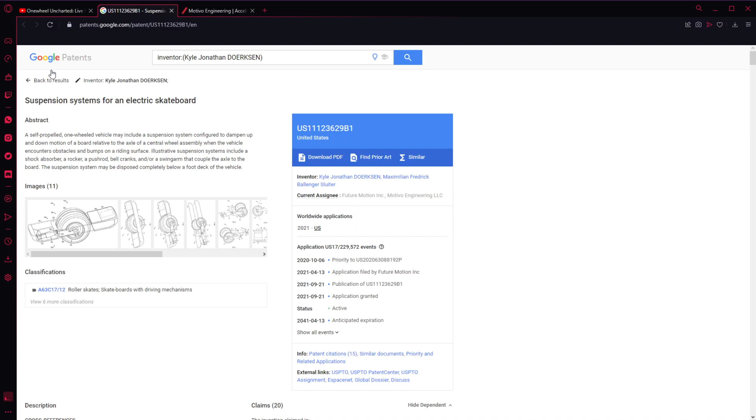On Instagram I put this on my story, and somebody responded to me with this link. It's a patent by Kyle Jonathan, and if you don't know, Kyle Jonathan is the CEO and founder of One Wheel. As you can see here, current assignee Future Motion Inc. This is very interesting because we're not sure if this is what's going to happen, but it seems like we're going to get a one wheel with a suspension system built in, as you can see from these pictures. I'll talk about that later.

With the abstract, I kind of grazed over all of this, but it's a lot of information—it's pretty much just repeating the abstract, and that's all you need to know for now. It's a one wheel that may—important word here, 'may'—include this. I don't know why they said 'may,' because that's an interesting word choice. What do you mean by may? Will you include it, or not? If you don't include it, why is there this whole patent about it? In my opinion, a patent should be about something you're sure about, not just 'may.' So I don't know what's going on here, whether this is still just a rough draft, or if there's something else to it.

It may include a suspension system configured to dampen up and down motion. Something interesting is that this suspension system is completely different from the Kiwi suspension system. If you don't know what I'm talking about, Kiwi suspension systems are these things right here—a very bulky thing, and they're very heavy as well. I wouldn't recommend them if you're looking for racing, and they're pretty expensive too. But it's pretty much like this, and if you compare this and this right here, it's not the same thing. This is insanely compact. Now I'm going to talk about these pictures a little bit later.

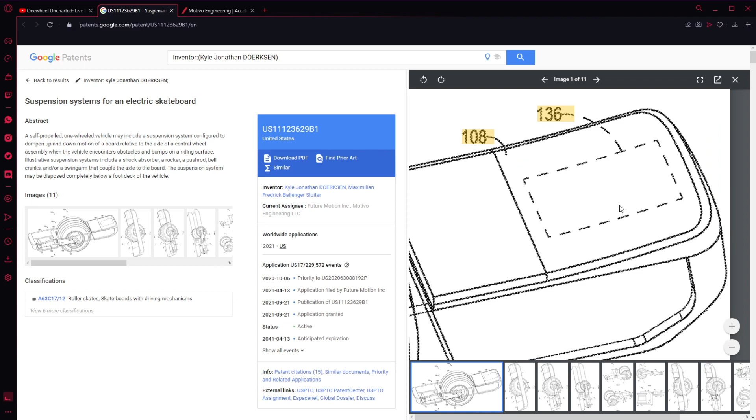I feel stupid now. Well, apparently this is for the electrical control system, which means this is also a very interesting shape for it. But it looks to be much smaller than our previous OneWheel controllers, which is interesting. And then there's all this empty space here.

If you notice, this place is sectioned off into two sections, as it literally says here. So would that mean... oh god, what have I done? Would that mean that the board is going to be longer? And another thing I see is it looks like the board is actually wider.

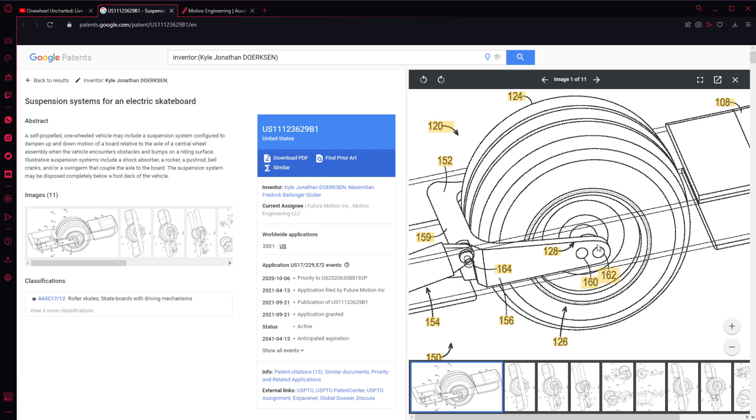This looks really wide for some reason, in my opinion. If you compare it to a normal one, I'm pretty sure there's not that much space between the rail and the screws in the middle. So I don't know what's going on with that, and I'm guessing it probably has something to do with this section right here.

But maybe the OneWheel is going to be thicker, wider, and maybe longer, or it's just giving the illusion that it's wider because maybe these foot pads are shorter, even though it looks kind of longer. And you'll see in another picture.

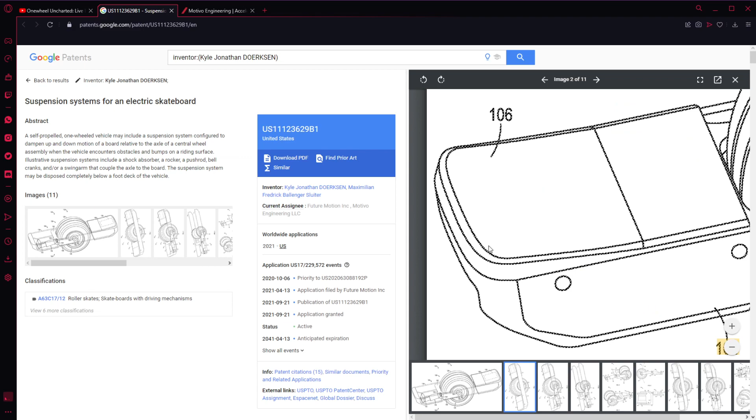So here we have it once again. I don't know if you can rotate it. Okay, here you can see it covered up. As you can see here again, there's two sections on the rear foot pad, and also it looks like maybe when you put in a different foot pad, you might only have to remove one section, because that's kind of how it looks.

And there's also these interesting holes here. I'm pretty sure it has something to do with these connecting points. That could be some pretty cool things, maybe having to do with mods.

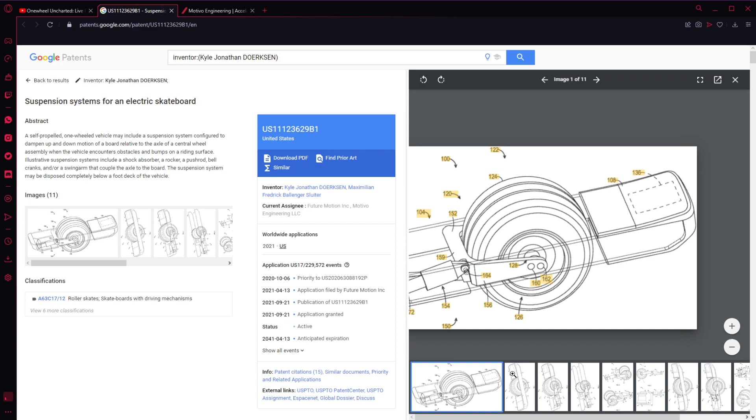Another thing I noticed is there's no screw holes here, even though here it shows there would maybe be some screw holes, or maybe that doesn't actually go through the rails, it just goes to the wheel, which I guess would make sense. But that would mean the actual wheel is connected through back here, which could do some interesting things if you want to put on modded rails.

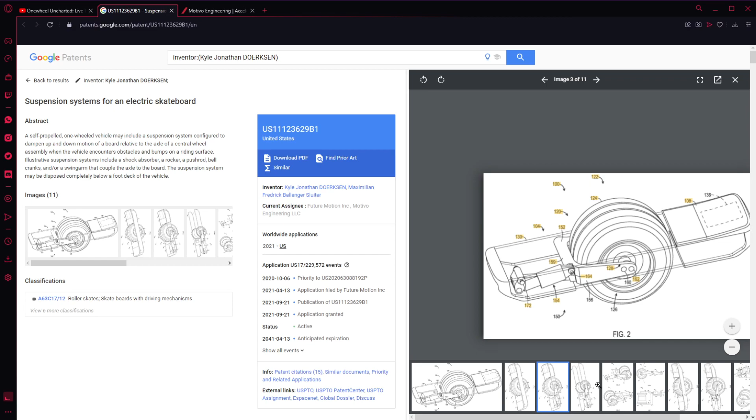And the thing is, I don't really know how it's connected to the front. I guess it would be vertically connected. And here, once again, we have it opened. I don't know why we have it opened again, because it looks pretty much the same as before, but once again you can pretty much see how it would be.

And then here we come to this part. This is where it kind of makes you think - these rails look... so first of all, the bumper will be a different shape pretty clearly. And it's interesting how much space there is here, which also makes me think they might be wider.

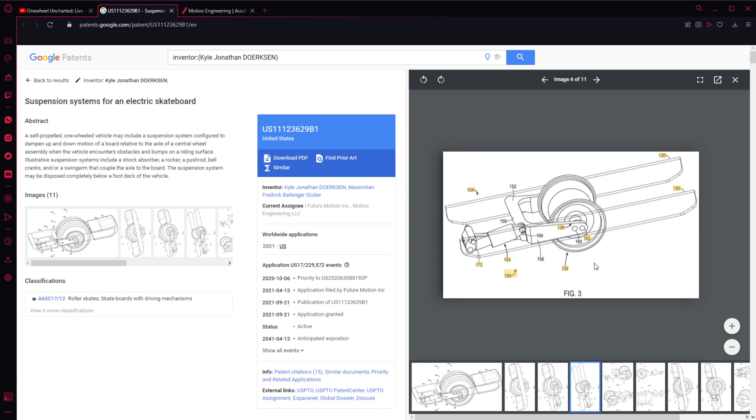And if you look at this, now I've never seen a board with just the rims, no tire, no foot pads, but this looks really long. So I don't know what's up with that. And here you have another nice view of it.

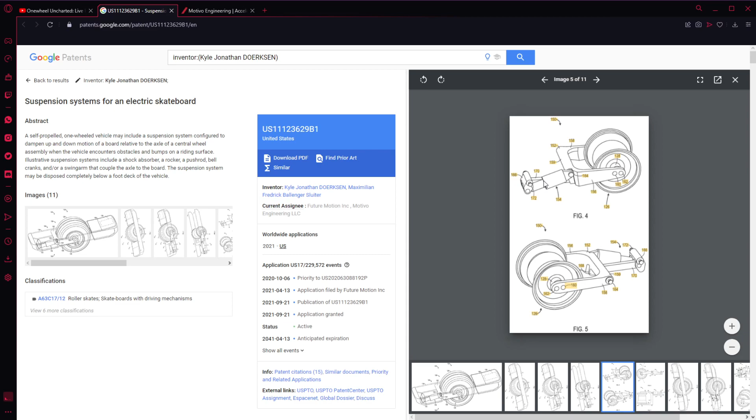So it's an insanely compact system. If this works, damn, good job OneWheel, because this is pretty compact for a full-on suspension system. Now it probably won't dampen things out as much as a Kill Guard suspension, but I'm guessing it'll still kind of dampen stuff out.

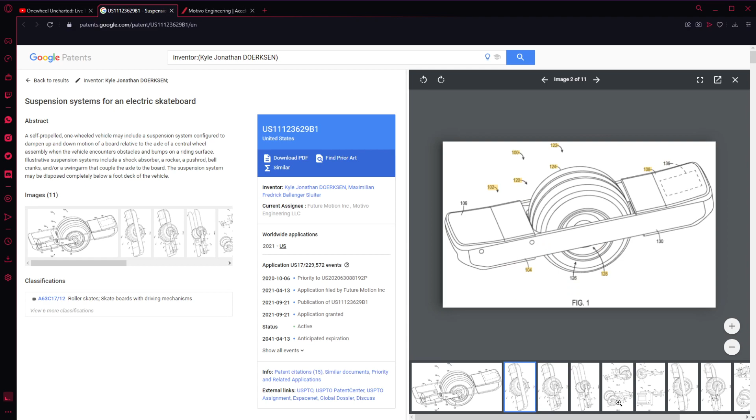Here you have another perspective of it. A thing that worries me a little bit is that it's only on one side, which would mean if the wheel is only connected through these two holes here - would that mean the wheel is only connected through here, like only these two points and not on the other side? Because that would be a very weak connection, it seems like.

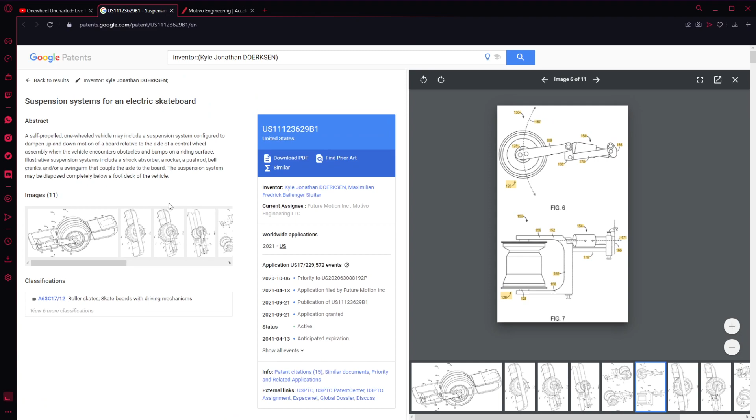Now, the next thing, which is very interesting, is there's actually two designs. They're very similar, but if I go to the next one, if you compare this one and this one, if I spin around and compare these two - see, it's different. There is this part right here. Now, I have no clue why there is this part.

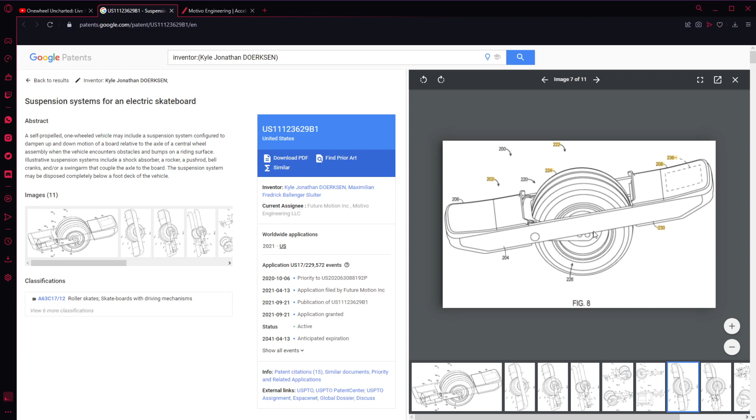I only noticed this now, but the board seems to be higher up somehow, which wouldn't be great, because we want a lower center of gravity, but maybe that's just how it's shown here. And there's going to be - the suspension system inside of here is also different.

But first I want to talk about these, because if we have these, it seems like it would be some type of sliding-in mechanism for the fender, instead of using screws. You would have to slide it in, which would considerably limit us in making more custom fenders.

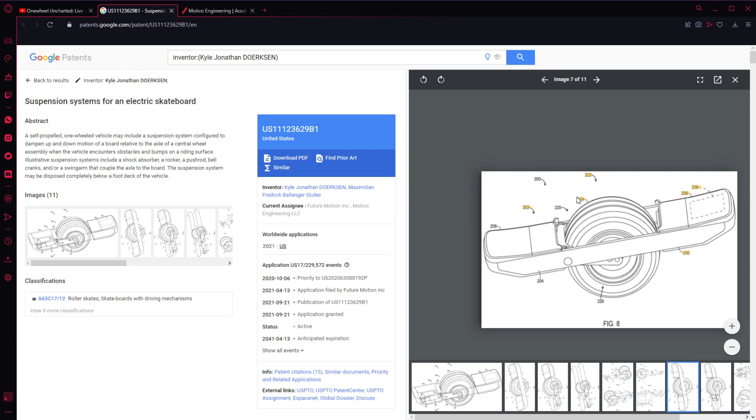That would also mean the fender would be easily removable, kind of like the Craft and Ride magnetic fender, maybe, depending on how secure it is. But that would also limit us a lot on how we can do it. Also, I've noticed there's a lot of space between the fender and the wheel, which I'm pretty sure a lot of people that ride with their feet close to the wheel would not enjoy.

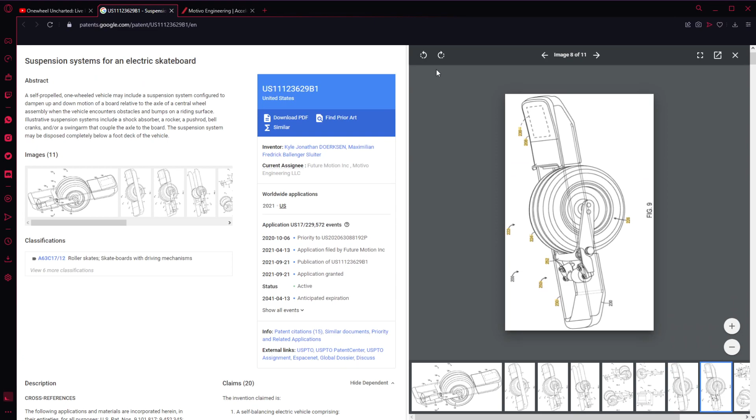Now here is where it gets very crazy, because here you can see the suspension. It's completely different than the other one. So these are two completely different designs. I don't know why they have this uplift thing because I don't even think you need it here. But this thing right here takes a lot less depth space than this one. As you can see, this one goes all the way in, but it only takes half of the width, whereas this one takes the whole width.

But then there's a lot of space back here, so maybe for this design, if they go with it, the battery might stay behind, and it might actually have a weird shape, seeing how they made this interesting form right here. There's a lot of up space somehow. So maybe the battery will stay behind, and here it does seem like it would be far more secure by connecting on both sides of the rail instead of just on one side.

Then again, it might connect - oh, it connects here as well, but this really doesn't seem as sturdy for the wheel holding in as other wheels.

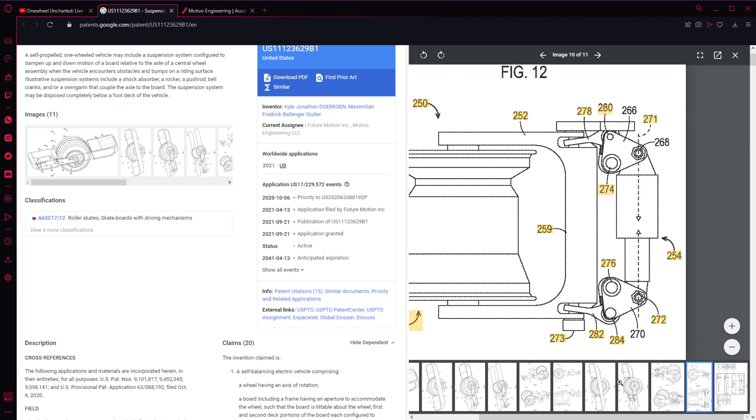Also, something interesting with this suspension is it would use horizontal suspension. How in the world does this work? It uses horizontal suspension. Okay, how is that converted to vertical suspension though? I guess, magic, I guess.

But once again, as you can see, the board is also very long, or what seems to be very long, and this seems to be a much more complex system.

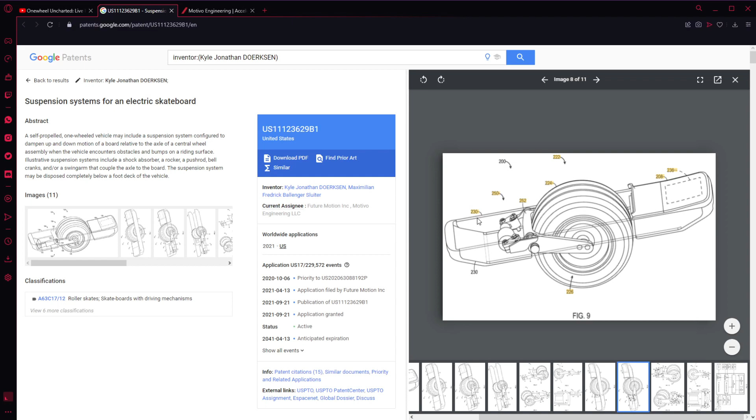Now what I'm wondering is, will the price for this be much more expensive than your average XR? Because honestly, I don't think One Wheel would really want to risk making it more expensive than $2,000, especially seeing how with the Pint they tried to get lower than $1,000. So it would be a very odd thing for them to just go for $3,000 for a One Wheel. I don't really know if the price is going to be different, or if the price is going to be the same as an XR but with less range, or if they have so much better technology that they can make smaller batteries that are also cheaper to make and have the same range.

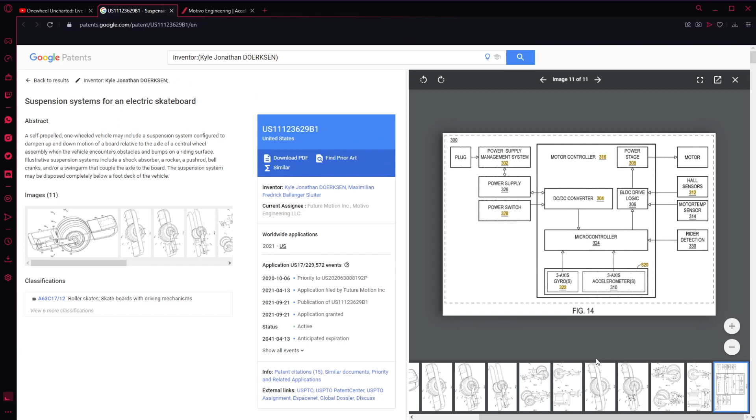And now lastly, we have this diagram here of how everything will work. I don't understand a lot of this, but I'm guessing this is how everything is going to go - the plug, and it goes through this whole system. I don't understand much of it, but I'll leave it here so you guys can see it. I'll also leave the link to this in the description of the video.

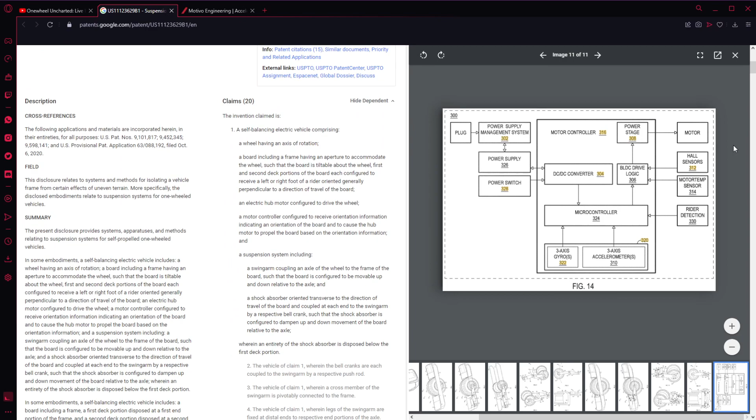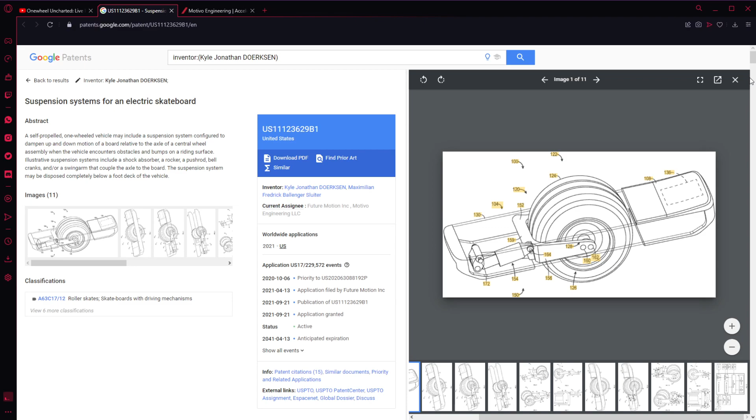So yeah, this is pretty much what's going on here. I don't know, I guess we'll find out on Wednesday, unless it's some other fender or something that they're going to release. But I'm really hoping it's going to be something like this, because this is going to be really interesting to see. I'd really like to see what it would look like without it being in diagram form, like 3D modeled to make it look realistic.

But yeah, until then, I guess this is as much information as we currently have. So if you guys have any other ideas on what's going on, please tell me in the comments.

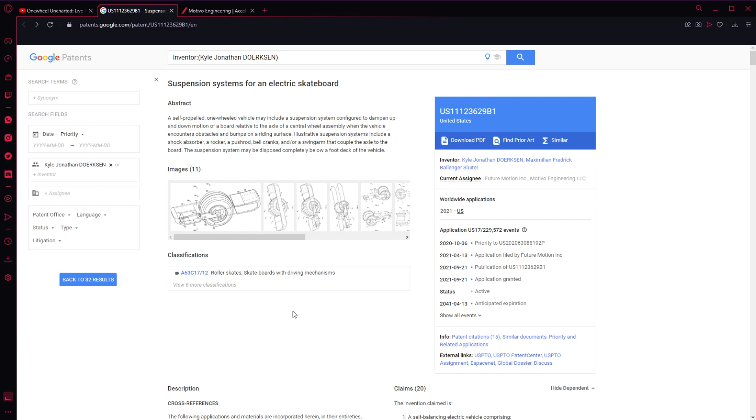And I also want to say there is a patent actually for an electric scooter that One Wheel made. So what is this? Maybe - I don't know - maybe this next thing might be an electric scooter, maybe it might be something else, who knows what it'll be. But for now, this is all we've got.